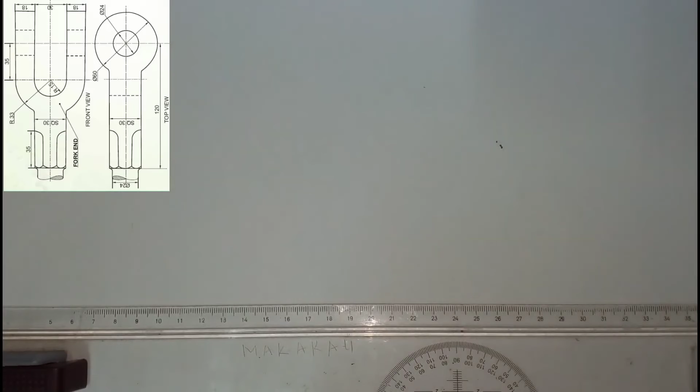Welcome to AASSA. In this video, we're going to look at isometric projection. The question I'm going to solve here, I've been asked by a lot of people to solve this question: I want to draw the isometric diagram of a knuckle joint.

So this one is the knuckle joint. We're also going to use templates which are on the set square.

I'm using 4H for construction lines. As you can see, my pencils are sharp - that is the trick in drawing. If your pencils are sharp, you're going to have a neat diagram. Just make sure that your canvas is tight.

You should be using this - this is the one I recommend. I'm using a clean rubber, and I'm using HB, which is the pencil I'm using for outlining. You can use B, it is also good. And my rubber right here, and I have my 30-degree set square, which is right here, and these are some of the templates that we're going to use.

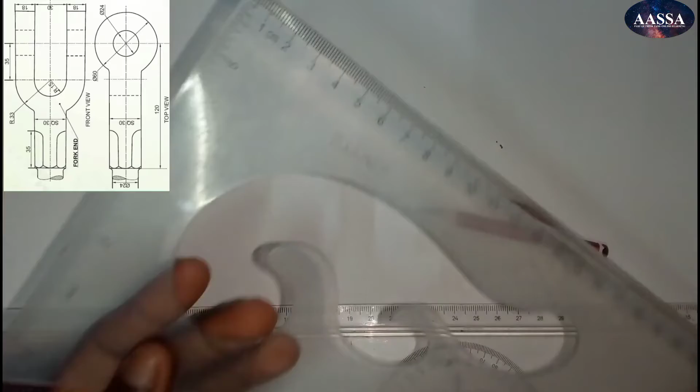So what do we do? Like always, first of all, I'm going to draw a reference axis. Make sure this one is as light as possible, just for you to see. This one is going to be our height, and we're going to draw our axis right here, and this one - so these are the axes that we're going to use.

This question is not for beginners. You should watch some of my videos to learn how to draw an ellipse in isometric projection, because if you don't know those things, this question is going to be difficult for you.

Now let's look at our question. In isometric projection, when given a diagram, there's an orientation which is best to draw the diagram, which is going to be easy. In this case, that is the orientation that we're going to use.

So let's look at the width. What I'm going to make my width is going to be that circular end. That circular end has a diameter of 60. So if something has a diameter of 60, that means the radius is 30.

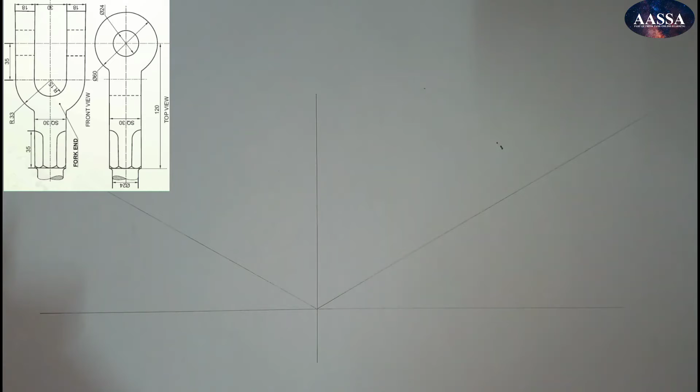So I'm going to come here and measure my 60 right here. It's just good to measure half, since we're going to need also 30. After doing this, I'm going to do the same right here - I'm going to measure 60 and 60. The reason why I'm constructing something that looks like a square is because I want to draw an ellipse.

For the height, we have 18 plus 30 plus 18. So let's start - we're going to measure 18 right here, we're going to measure 30, and we're going to measure 18.

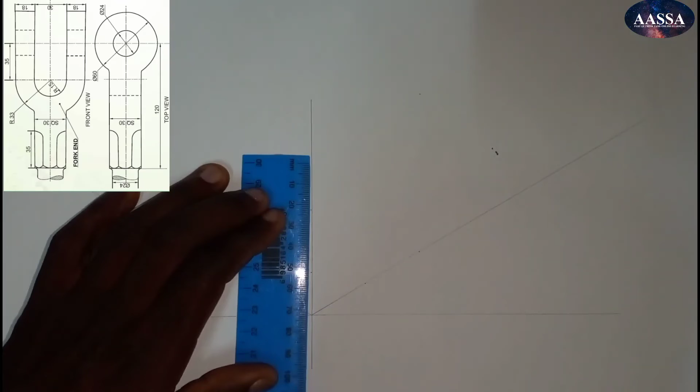Now what you need to do is take your set square, and we're going to project right here. We've measured 60 upwards, right here we have measured 30 upwards, and also going to do the same. In isometric, it's all about concentration, because we're going to have as many construction lines as possible, so you should just keep focused, know what you're doing.

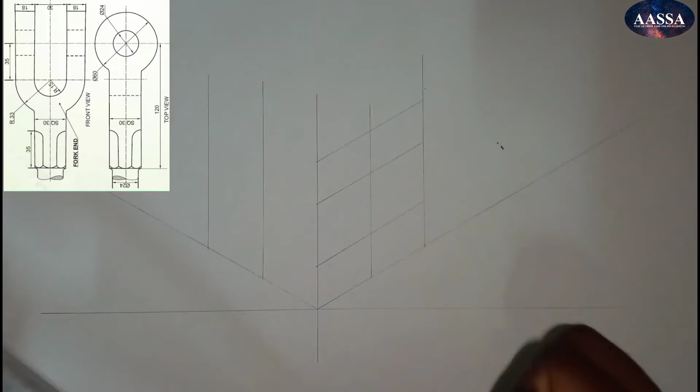That is where we marked 18, and right here it's 30, and right here we've measured 18. We're going to do the same right here - we've measured 18, and now it's a matter of joining these lines.

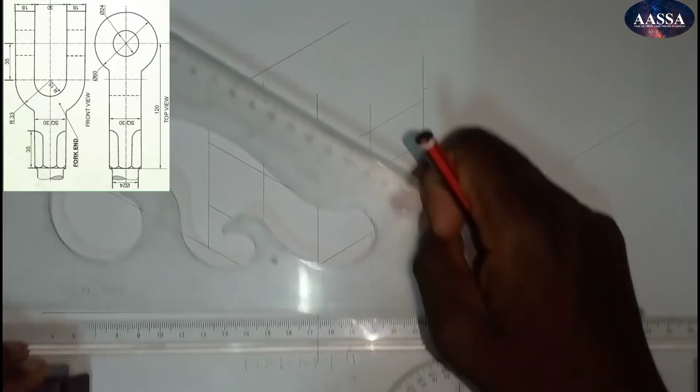So let's construct a box that is on top right here. We're going to come right here and right here. Now we're going to go to the middle of our top plane right here, we're going to join right here, and I'm going to come right here like this. We're going to come right here at this corner, draw this line, and I'm going to come at this corner and draw this line.

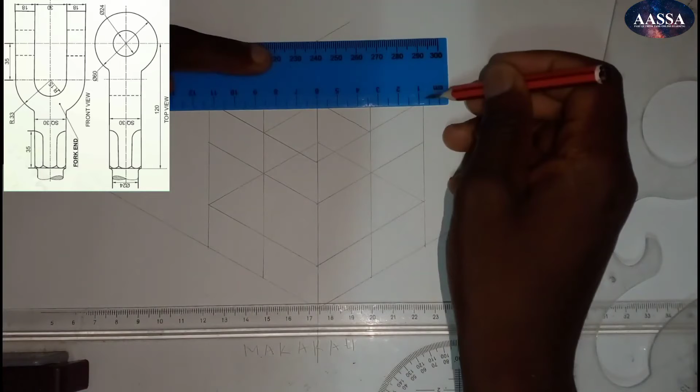Now it's time to draw an ellipse. You know the formula - we're going to join this diagonal with this diagonal. Remember, using 4H to do this, because these are all construction lines. After doing that, we're going to join this one and this one.

Like this, and allow me to mark this as one of our centers. So this is one of the centers that we're going to use. Now join this and this, and this one is going to be one of the centers that we're going to use. And this one is one of our centers, and this one is one of our centers.

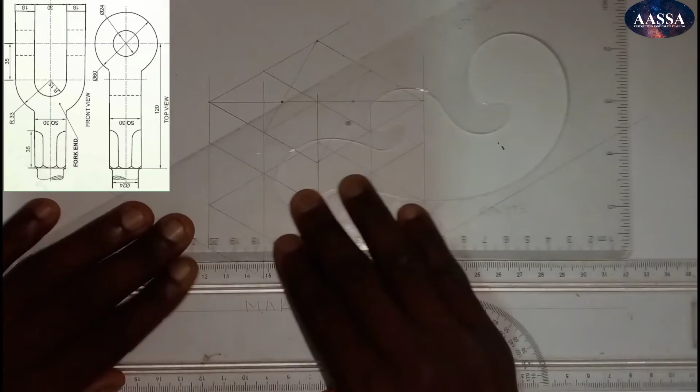Okay, so let's look. If you look at the end of the front of the fork end, you're going to see that it is 30 millimeters wide. So take a ruler. We're going to measure 15 right here and 15 right here. If we do that, we're going to have our square 30, right? So we're going to come right here, draw a line like this, and draw a line like this.

And now what we're going to do, we're going to take your compass, right? You're going to start come here at this one of your centers, right? As you can see, you're going to put your compass at this end, right here. And make sure that it will draw a very, very good circle, right?

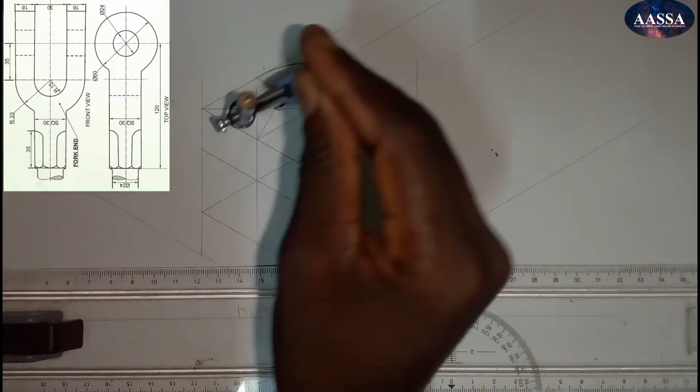And after that, you're going to strike a circle like this one. After doing that, you're going to come to this center point, right? If you come to this center point, you're going to complete this circle right here. Okay? And when you're done doing that, you're going to come to this point and put your compass where this circle ends, and you're going to complete the same circle.

Like this one. Now I'm going to come to this point. You don't want the circle to cross this line, right? So joining it up to here, and I'm going to need it to come right here. Okay, so it needs to touch this line.

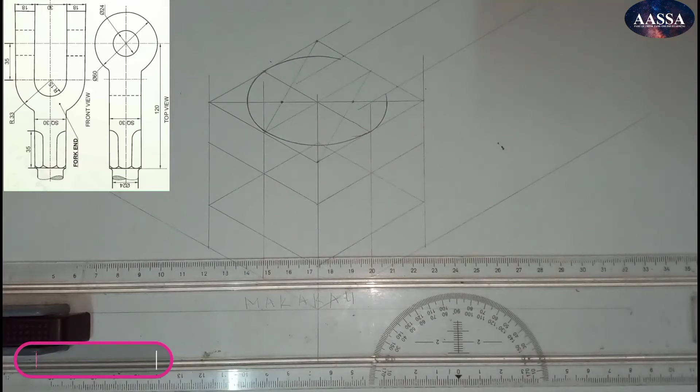Okay, and we have an inner circle. If you look right into the diagram, we have here a small circle that is on top of this one, and that one has a diameter of 24.

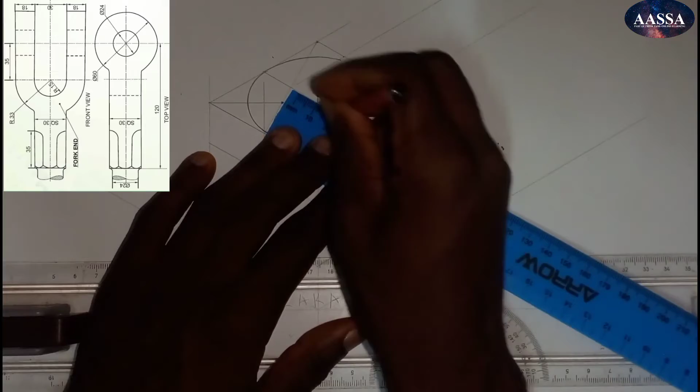So we're going to come to this point. Since it has a diameter of 24, that means we're going to measure 12 on both sides. And we're going to come to this point, this end, and to this end. So right here is 24, it's 12, 12, making it 24. Taking this as our center, we're going to measure 12 here. And if we do that, we're going to construct a square right here. So this one is our square.

So the thing that you have to do is to be focused, because you can see these are construction lines. They're going to be too many, but when you are focused and concentrating, you're not going to have a problem. And if your diagram is correct, you can see the long diagonal is already joined. So your job is just to join this diagonal and this diagonal.

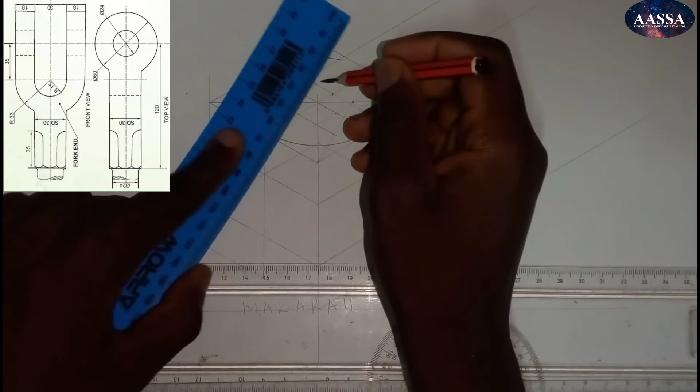You're going to repeat this circle for an ellipse. So if you don't know how to draw an ellipse in isometric, it's wise for you to check in the description. You're going to see a lot of videos where I've shown people how to draw a circle in isometric projection, right? So taking this as the center line, this one is going to be a full circle, so there's no need to worry.

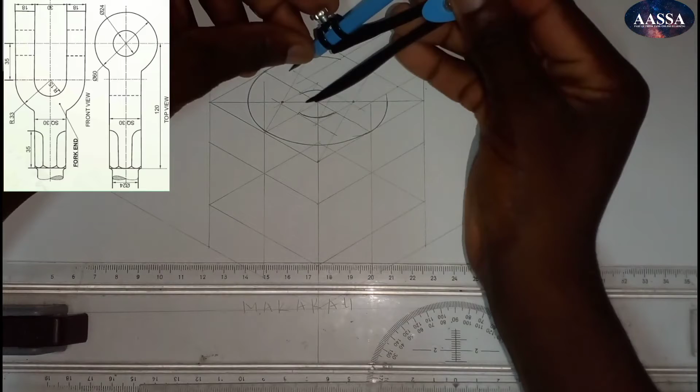Okay, now come to this point. Now we need to join this and this, right? And if your compass is not drawing a full circle, you may just change the position a little bit and look where it is going to fit, right? And I'm going to come to the opposite side, which is this one, and you're going to repeat the process again. I'm going to draw this circle.

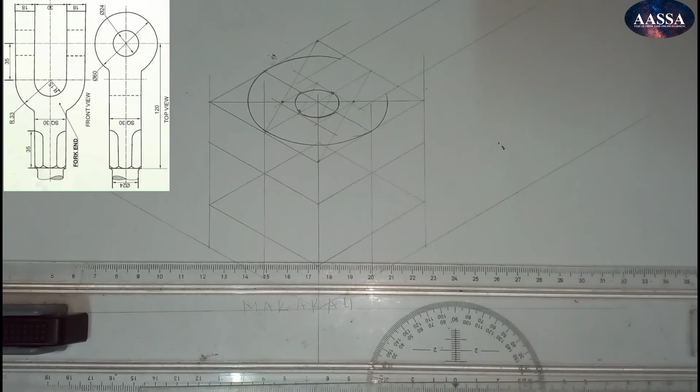Okay, like this. So before outlining, what I need to do, we have to draw an ellipse underneath. We're not going to do that. We're going to transfer those center points, right? So let's start with the center points for the big circle. That is what we need, because this one I'm not going to see it. So I'm going to just draw this, and come here and draw this, right?

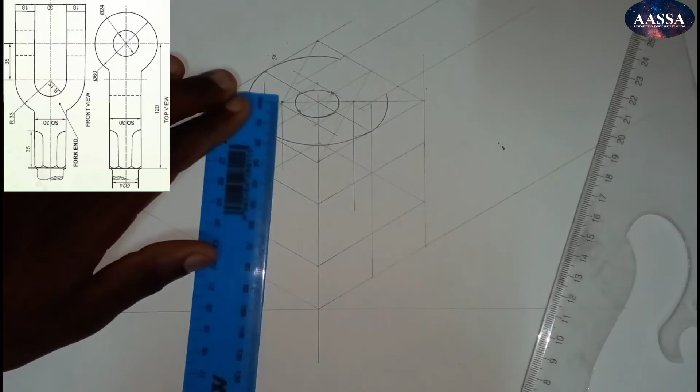So we know that the distance from here to here is 18. So I'm going to come to this center point right here, and I'm going to measure our 18 right from this center point. We're going to measure 18, and if you measured 18, make sure you marked it, right? And also going to measure this center point, the one at the end right here. And if it is correct, it should just pass through the outline, right? And if it is not, you can just continue and change it. So we're going to have our 18 right here, okay? And now come to this point.

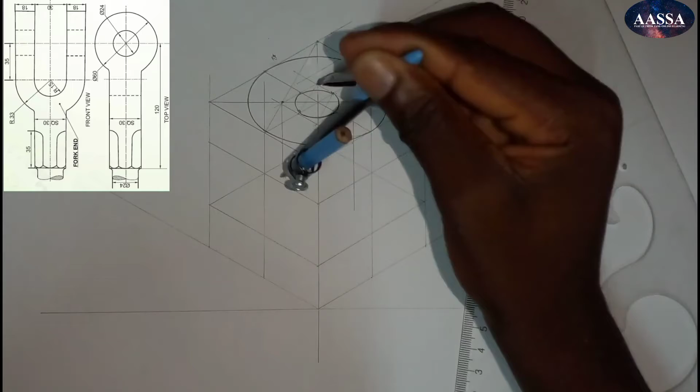This is where we opened our compass to draw this circle. This is how you draw it, and I'm going to transfer it to that center, and draw a circle like this one.

As you can see, they're going to come right here. We're going to bring our compass up to this point. This is the point, and now we've measured 18 from that center point, and we're going to draw this, making sure it just touches like this one.

After doing that, you're going to join right here using a straight ruler. You're going to come to this point, open your compass up to right here, where we've measured, then come to this point and touch this circle, drawing something like this. After doing that, take your ruler and join these lines.

Now, using this method of transferring centers, we can draw a circle here, but since there's a big distance right here, I'm afraid our circle may shift. If we make an error of 0.5 millimeters here and try to extend this line, the error will become big.

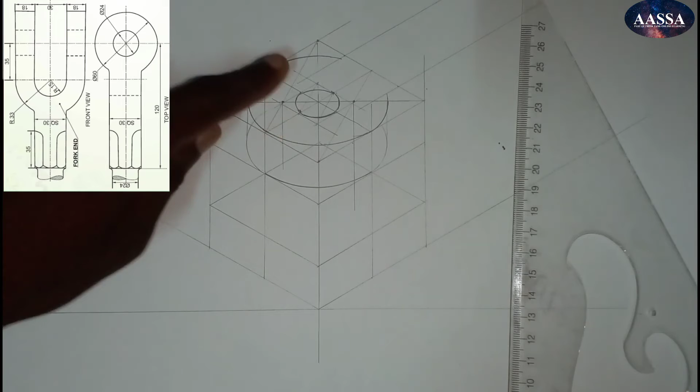So it is wise for us to just do a longer process right here and draw this one, join this one, and join this one. Now it's time for us to join this diagonal and this diagonal, and now join this one and this one. So this one is going to be our center.

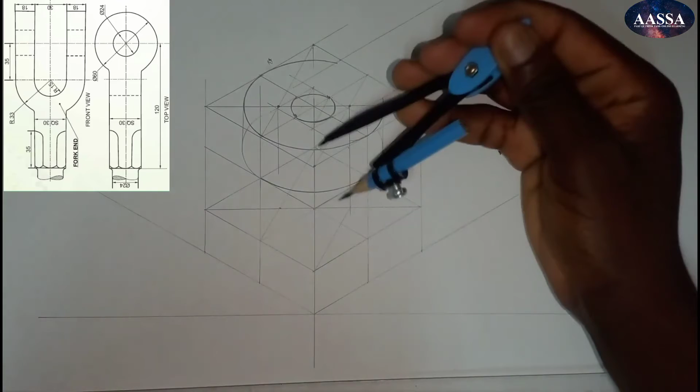Now we're going to take our compass. Using this as the center, we're going to touch this point right here and draw a circle like this one. Come to this point right here - this is our circle's center point. We're going to draw a line that will touch that circle.

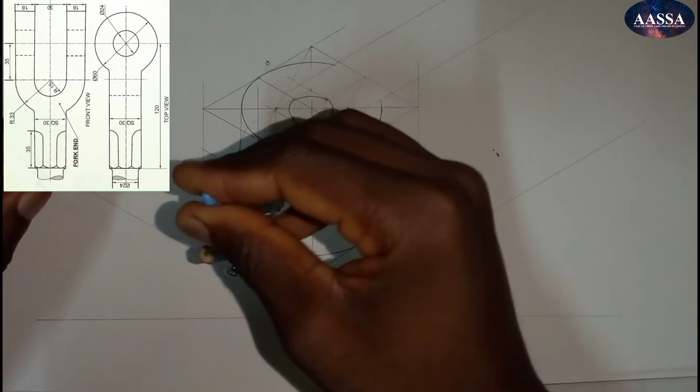Now come to this point. We're going to touch this line and draw a circle like this one. Now what we're going to do, you can even take our compass right here.

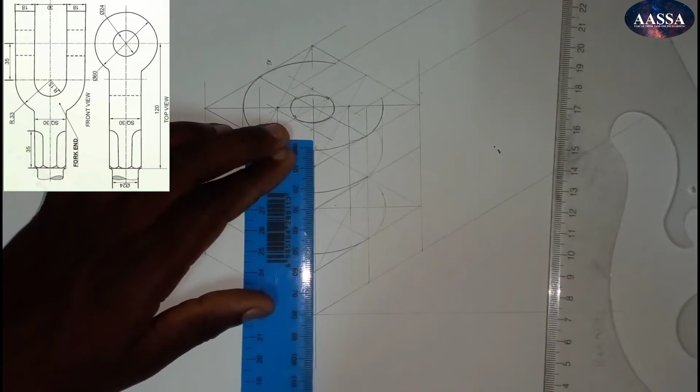You can see we're good now, and we're going to transfer those center points. Take a ruler - this one was our first center point right here. Extend it downwards, and we're also going to measure 18 from each center point - 18 right here and 18 right here. We also need 18 from this end point, so 18 right here. The reason I'm not measuring this center point is because we're not going to see it.

So from here to here we have drawn our circle. We're standing right here, so go to our new center point, which is right here. We're going to finish drawing this base, like this.

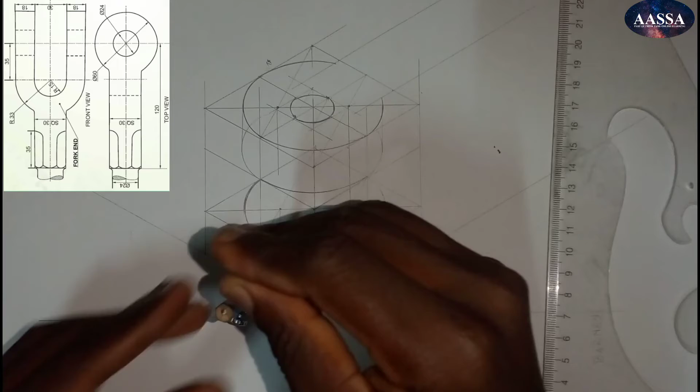Now open this up to here. Come here, and we're going to finish by doing this. Now when we draw this, we're right here, like this, and now going to finish. This is where our 20 is, and we're going to draw it like this.

As you can see, now we can join these two points together, and you can do the same right here. Things are just getting out of control with me - too many construction lines.

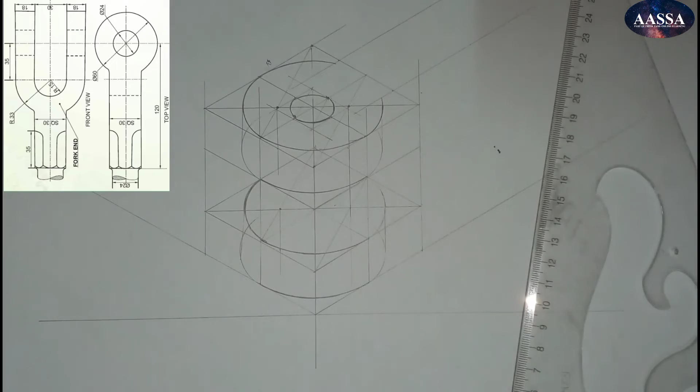Using this as our center point, I'm going to draw a circle right here. We're going to measure 12 right here and 12 right here, and also measure 12 right here and 12 right here. So just stay focused, don't get confused with construction lines. Now I'm going to join this and this.

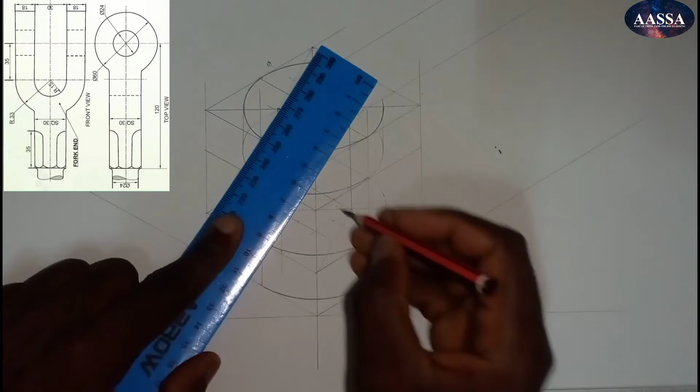Okay, and we're going to join this and this. We have the long diagonal already. Join these two center points, this corner and this corner. And now it's time we draw a circle right here.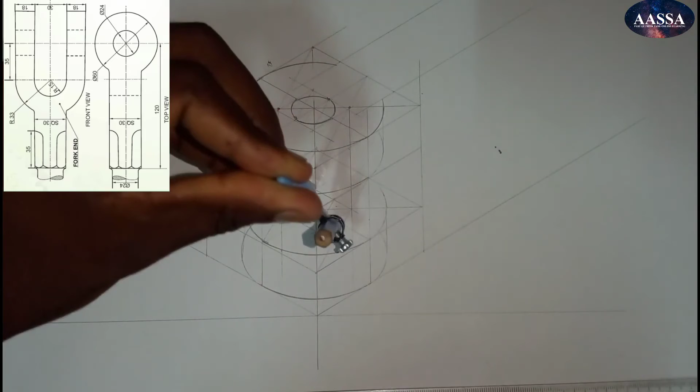Come to this point, and I'm going to draw a circle here. I just switch to using left so that I can't block the view. Okay, it's kind of shivering.

Right here, this is what we're going to have. Now come to this center point, and it's time to finish that little circle.

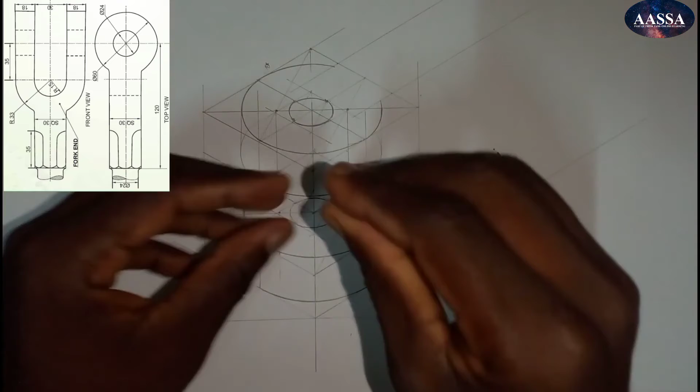Now come to this center point right here and finish this circle, like this.

Before I proceed, what I'm going to do is outline. If you're drawing circles, you need some center lines, so before we forget, let's put our center lines.

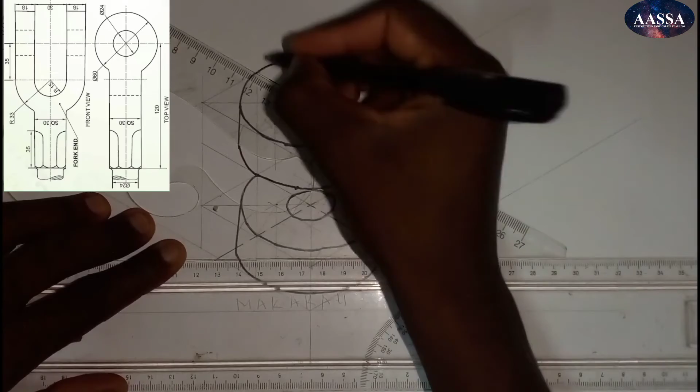Right here, and I'm going to put this one right here. Also going to do the same on top right here. When you're drawing a center line, you don't end with a short stroke, you end with a big one.

Okay, so this one. And now what we're going to do, take a ruler. We're going to measure 35 from the center point.

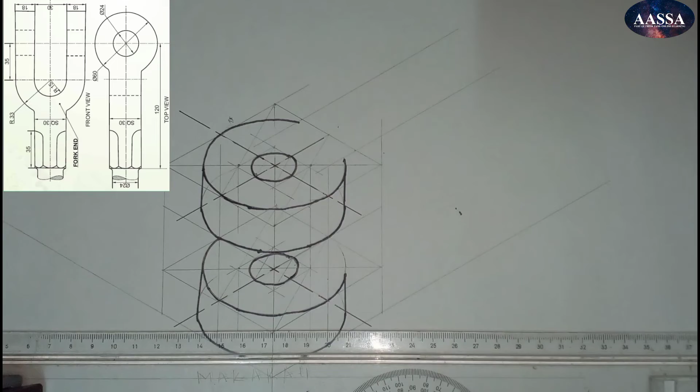So you can see it's going to measure... we're going to measure 35 from here. After I measure 35, check your set square, make sure that your set square is at a clean surface, because if it is not, it is going to make your diagram look bad.

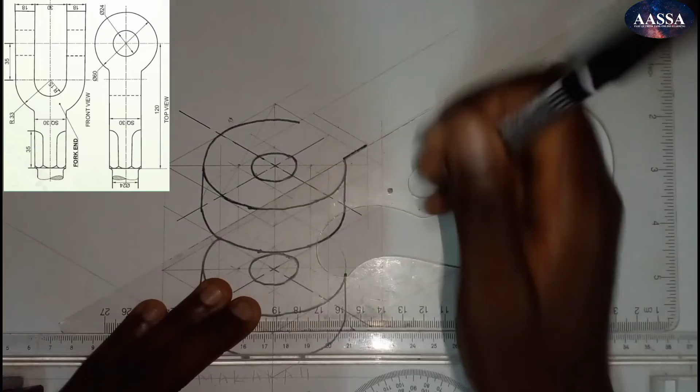And after doing that, you're also going to project this line downwards. And now, just in case in the examination you need to do something, just make sure you outline it when you are certain that you haven't made any mistake.

We know the distance from here to here, we've said it is 18. So I'm going to measure 18 right here, and after that we're going to outline. We're going to need 18 right here, and also a construction line, because this one is going to extend, we don't know where it is going to end.

And now we're going to go right here. This one is our center, so it is the same. We need 30 right here.

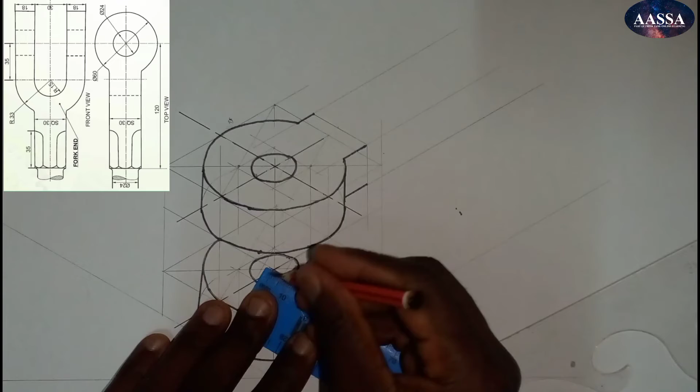Right here we're going to measure 15 from here, from this center point. So 15 is right there.

Take your set square and you're going to draw a line like this one. And now that you are certain that this one is correct, you can outline right here.

And now come right here, this line, also going to measure 18, and after doing that, I'm going to draw a construction line, this one, so this one should be as long as possible, and so that's this one.

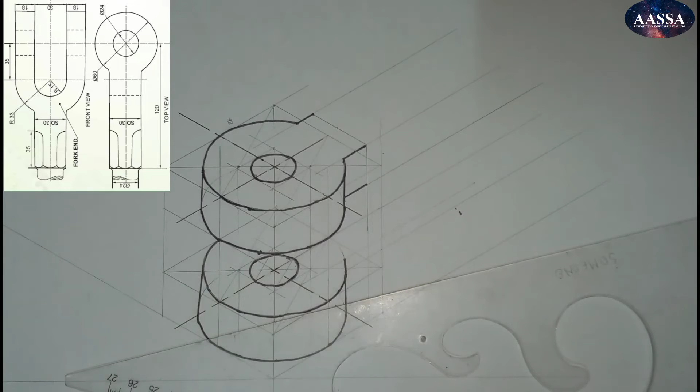And now it's time to outline up to here, but before we do that, let's project this line downwards. And what we're going to do...

That's the line that I constructed. It was not supposed to be there.

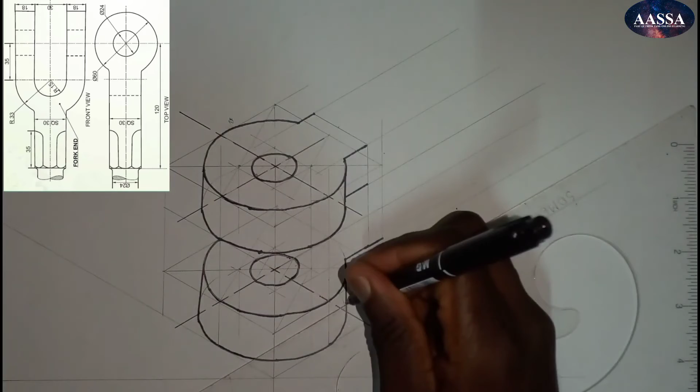Okay, so here, up to this line. Let's extend this one.

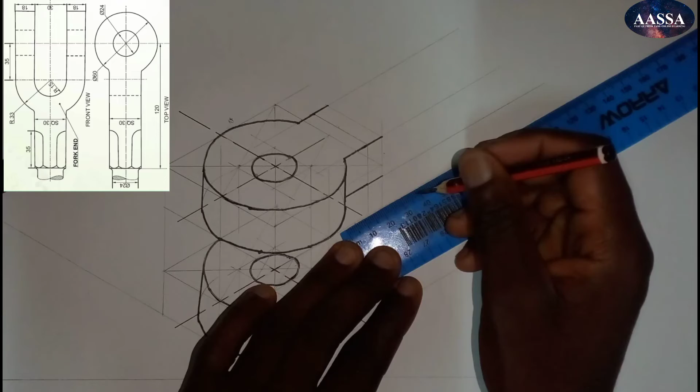Now what we're going to do, so you know that we need to draw an ellipse right here. If your measurements are correct, you should get 15. We're going to measure 15 on each end, 15 here and 15 going this direction.

If you do that, we're going to draw this one, it's going to be our ellipse. Right here, just pay attention and focus.

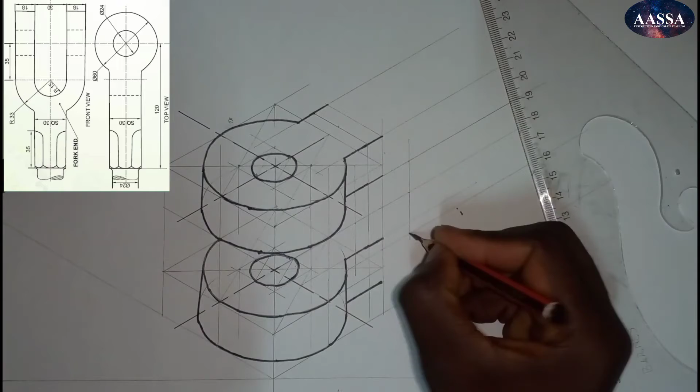So this one from here to here to here up to here. We know the corner points, and now it's time to join this and this, your center and this one right here, this corner point, and right here.

Now that you have your centers, you're only going to need these two center points. Take your compass, open it up to this point, and right here we're going to strike. Let's do that.

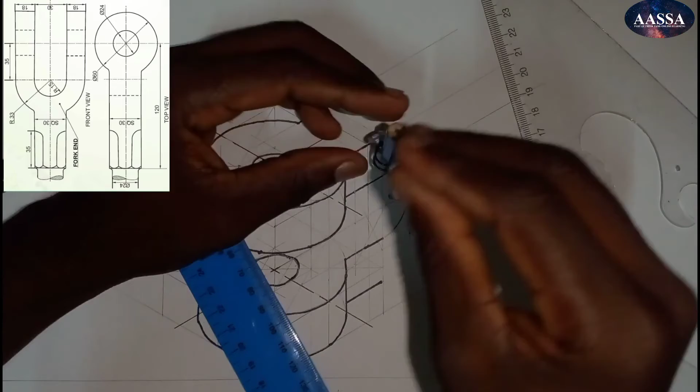Good. And now let's come to this point. Now it's time to join this and this.

Okay, that looks cool. What do we need? We need another big circle like this one.

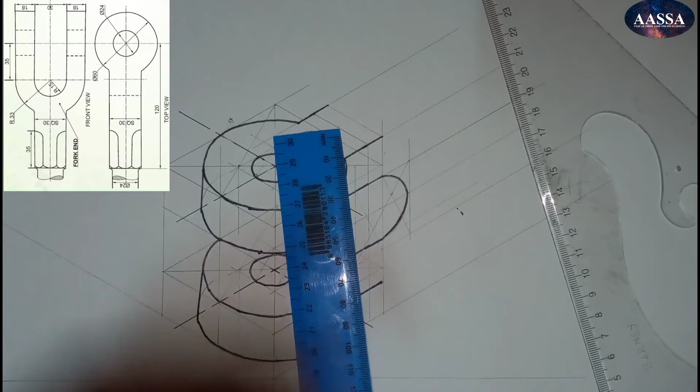Okay, so let's outline. From here to here, we know that's going to be 18 plus 30 plus 18, so that should give you 60... that should give you 66. 18 plus 18 is 36. Okay, so from this point to this point, that should give you 66, right?

Okay, so if you have 66, you're only going to measure 33 on each end, right? Using this as a center point, so 33 right here is what we are going to do.

Okay, and once we do that, we're going to come here and draw this and make sure this line is extended up to here, and we have measured 33. It's right here. So I'm going to make this line a bit crazy so that I can see where I'm ending when I join this diagonal and this diagonal.

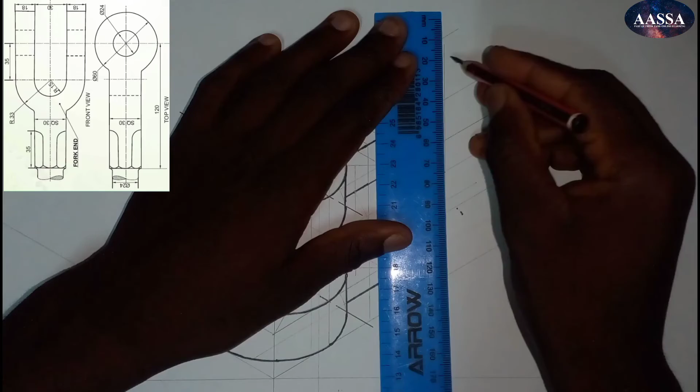Okay, it's actually here. And now from our center up to here, which is right here, and now to the corner. Where's our corner? So the corner is right here. Okay, and it's going from here.

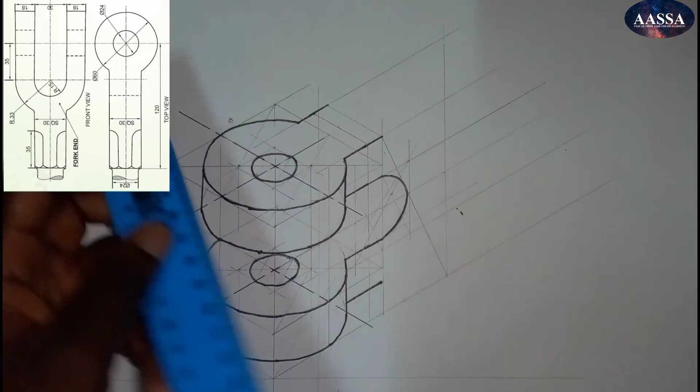So I'm going to come to this point and this point, right, and just make it long so that I can just reference it from here. Okay, so from here it's going to be simple. I'm going to come to where this diagonal line...

Okay, so this was supposed from here to here. Okay, just be careful right here. And now I'm going to come to where this line is going to meet this line. It's meeting it right here. Now I'm going to come to this point, right?

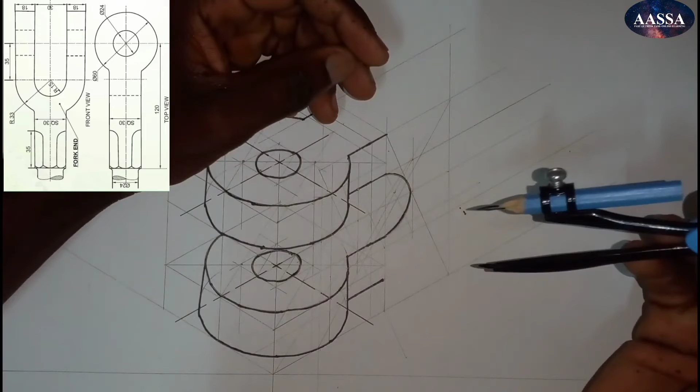Okay, and now I'm going to draw a smooth circle like this one, and I hope yours is good. Okay, now come to this. This is where these two lines are joining each other. And now if you connect this line, you should draw a line which should touch this, right?

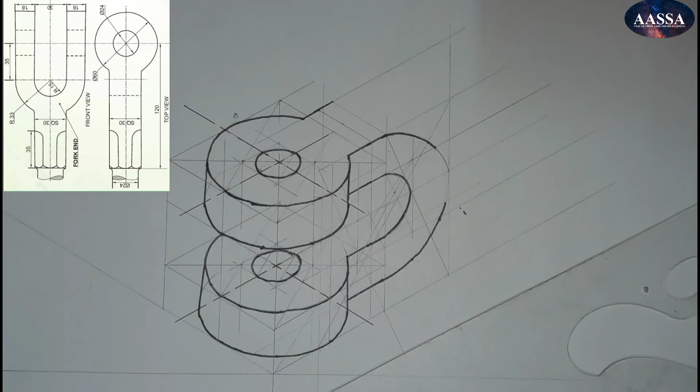Something like this. Okay, and if you do that, now what you need to do is just extend these lines, right? We know where it is meeting, so I think you can outline, right? Okay, and now it's something like this right here.

And what I'm going to do, we're going to transfer centers, right? So remember the center line, the center point that we used to draw, which was right here, and the distance from it is 30. So I'm going to go to that center point, right? Just make this one as long as possible.

Why am I making it as long as possible? So that you can just easily track it, right? So this is the line which is going to touch right here, and from here I'm going to measure 30, and 30 is right here. Okay, so when I drew this circle, right, this one, I was right here.

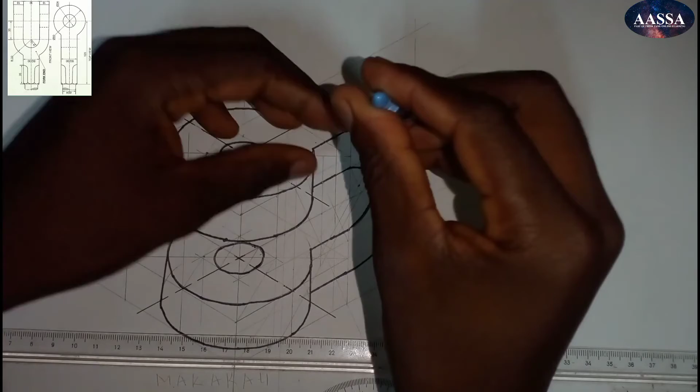Now I'm going to go to where I've measured 30, right here. Now I'm going to go right here, and I'm going to draw something like this. And when I'm certain that this is what I want to draw, I'm going to take my ruler and outline, right?

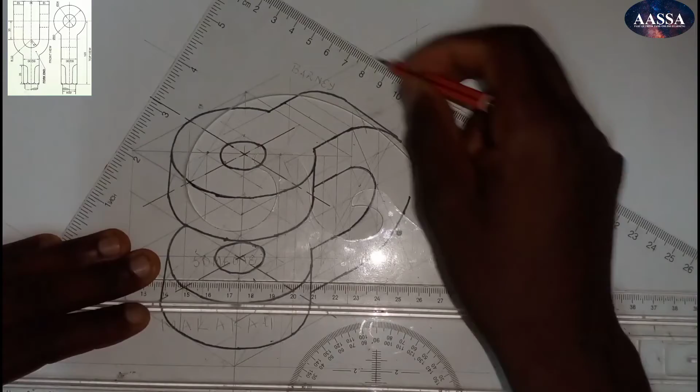Okay, and what are you going to do? Okay, so right here, just going to construct something like this, okay, to maintain that length, right? So we need 30 right here, so just going to come here and measure 30 right here. And as you can see, the 30 is right there.

So I'm going to come to this center point, right? As you can see, the center point of this line, you're going to come right here, and this is where I need you to measure 120, right? So we're going to measure 120 right there.

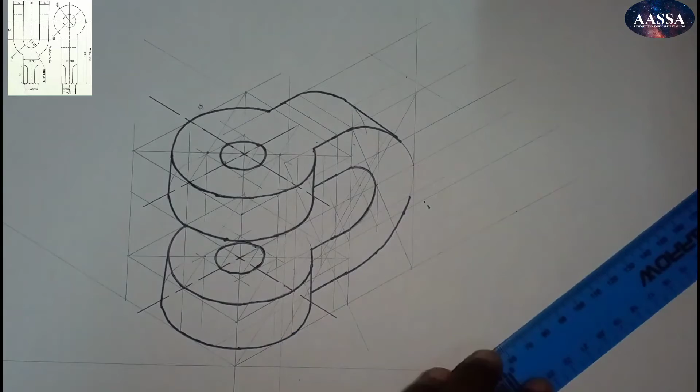And after measuring 120, just need you to construct a line, okay, like this one. Now I need you to measure 35 millimeters from the end of that line, from the end point of that line right here, okay.

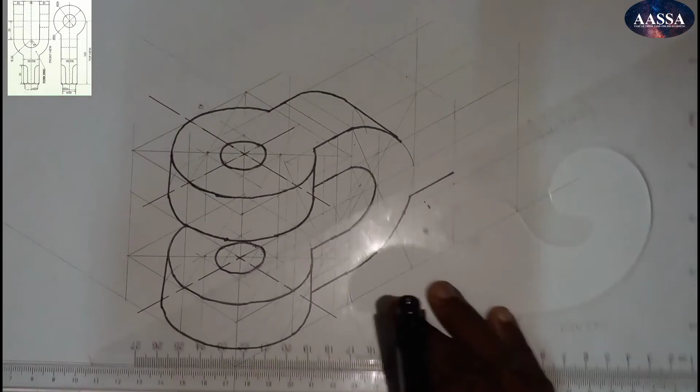And I need you to draw something like this, okay. And after doing that, so I'm going to come right here and draw a line like this one. I'm going to draw this one again, and it is ending right here.

Let's just draw an axis so that you can see where this line is going to end, right, like this, okay. And right here, what we need, you're going to take your set square, and you know this is where it said 120 is ending, right?

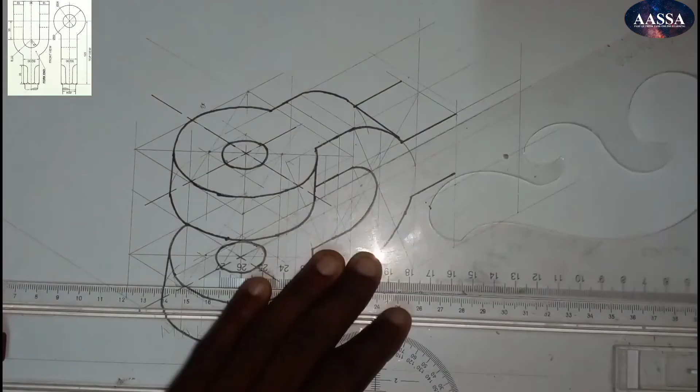So let me just try to put it right there, and I'm going to draw a line like this one, okay? And right there, there's where the line, this line is touching that construction line. Let me try to make it dark like this one.

Then we have this one, which is right here, and this one, which is right here, okay?

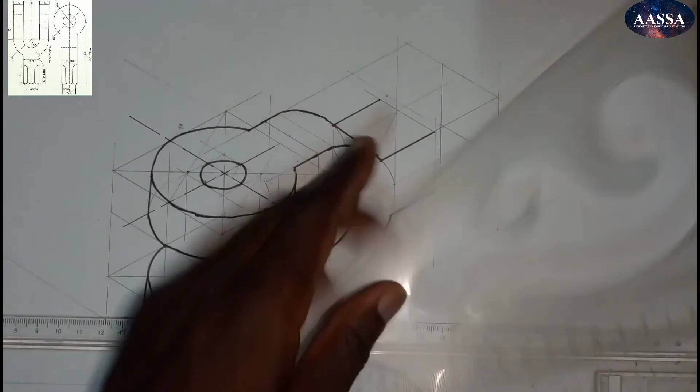And from here we have this center point, right, which you can see right there. I'm going to construct it like this, okay? And now it's time to divide this.

As you can see, it's 30, so I'm going to divide this to make this one 15. I'm going to draw a line like this, okay? Now join this long diagonal and join this one, and join this one, okay?

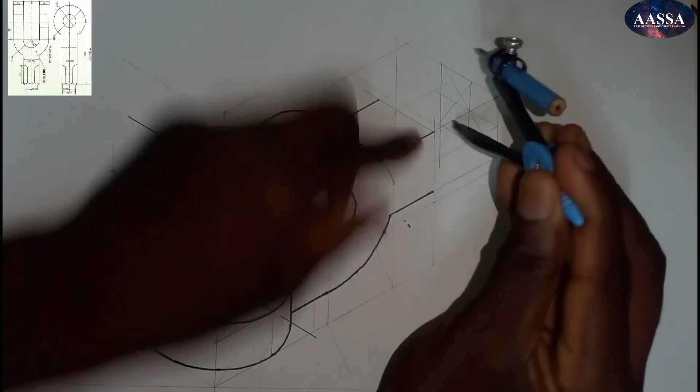What I'm going to do, so this one is our center point, just going to draw an ellipse, right? And this, we're going to draw this in construction line, right? So that's what we're going to do.

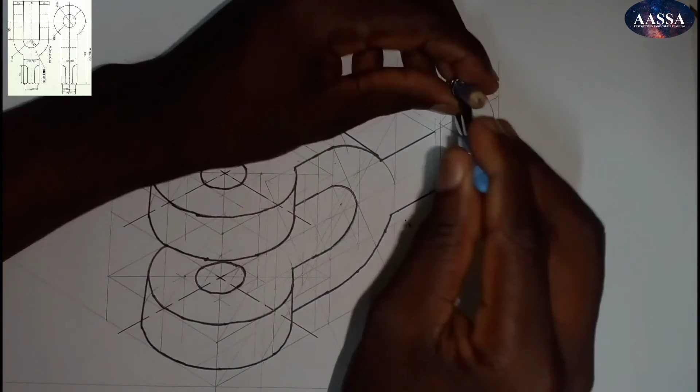I'm going to come and draw something like this, okay? And now I'm going to come to this, which is the center point right here. We're going to draw, so center point is right here.

As you can see, we're going to draw a line like this one, okay? And I'm going to come to this center point right here, and I'm going to draw a line which is going to touch right here, okay? And now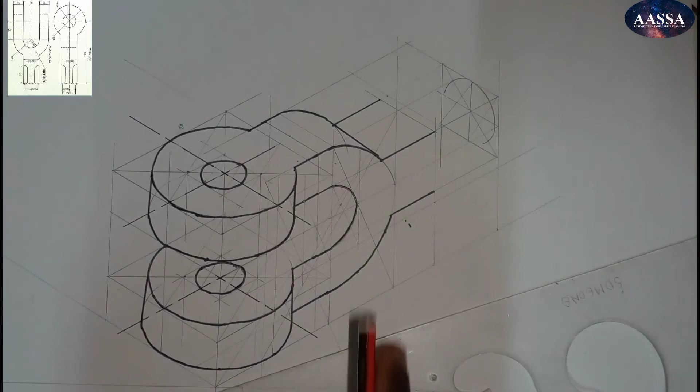I'm going to take this one, and right here I'm going to use this template. So just know that since it's isometric, right here it's going to be a little big, and right here it's going to be a little small, okay?

So I'm going to take a template, right? And those are the things that we're going to use right here. So if you take templates, just find where they can fit perfectly, okay? Where they can fit perfectly, and I think right here, okay? You take them.

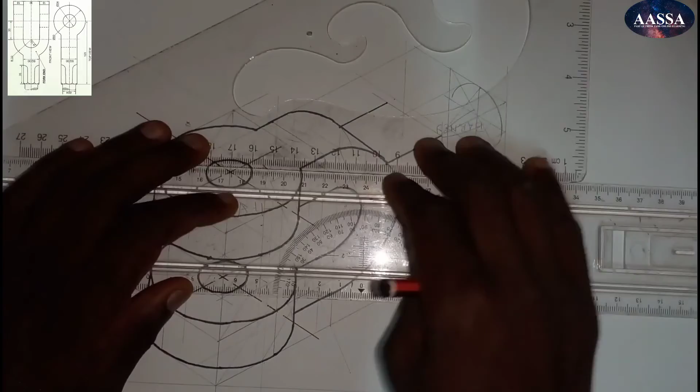We're going to come right here and find where you think it is just perfect for you, okay? So I think right here is fine, okay?

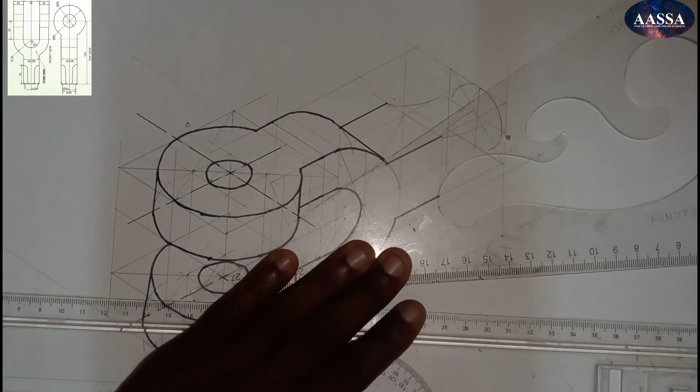Now lastly, this piece, okay? So right here, then I'm going to draw, okay? So just think right here, and I'm going to try to connect this and this, okay? So I think right here I'm good, right here I'm good, okay?

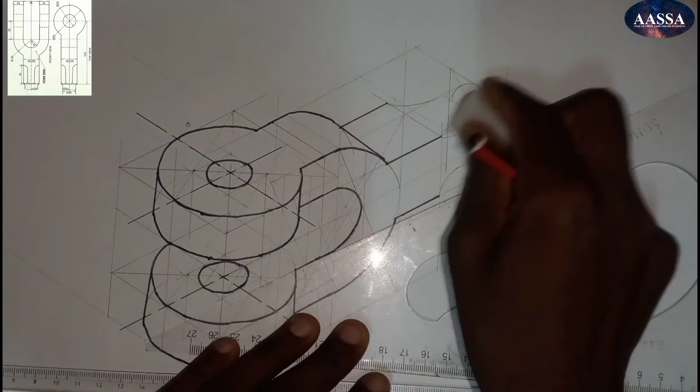And right here I think this one is just small. I'm going to try to make them just a little bigger, right? Okay, so I think something like this will be fine, okay?

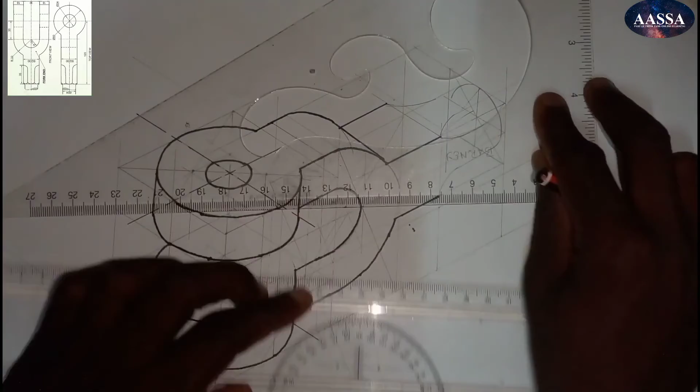And come right here and draw something like this, okay? Now just trying to join them just like this, okay? Now go to where it is ending right here, and right here you just need it to be very, very, very, very small, right?

Okay, something like this right here, and something like this. Good. Okay, and I think if we do this, we're good to go.

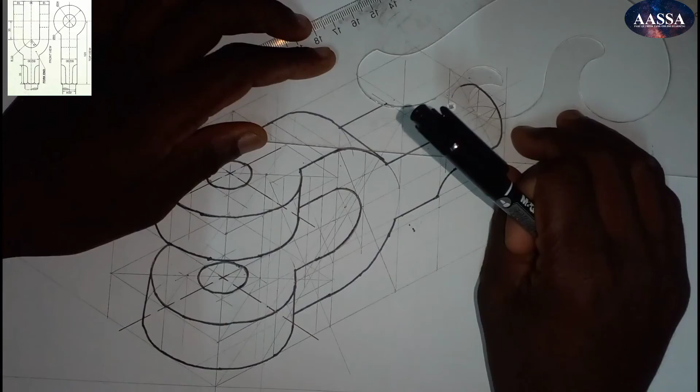Okay, so now let's see what we have. Let's outline. Okay, so we have something like this right here, and we have something like this right here.

Okay, and now what about here? We have something like this. Okay, and right here we have something like this.

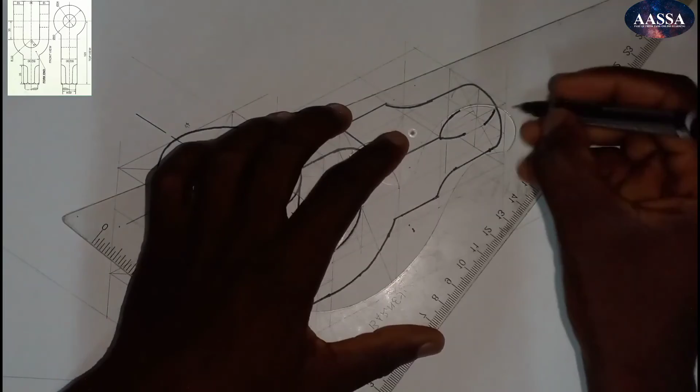And now it's time to connect this line and this line, and right here is going to connect this and this. Okay, like this, as you can see. That's our win, right? And lastly,

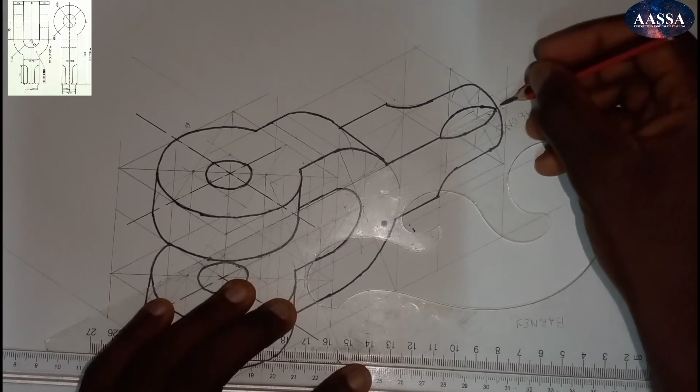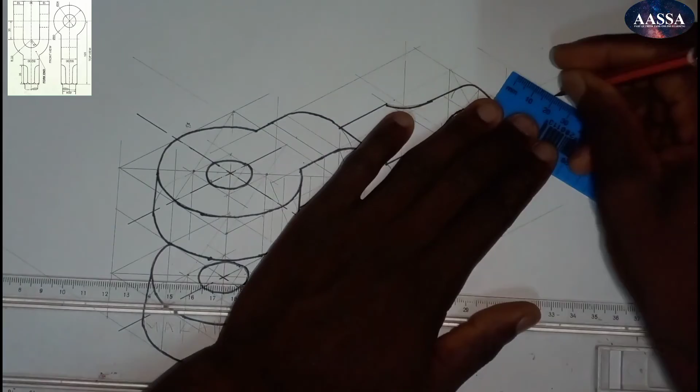we're just going to draw, take this one, a center point right here, which you are seeing right there. Okay, we're not sure the length, so I'm just going to measure something that you think is reasonable and draw this one. But I told the diameter of the shaft, right? That one it is 24, right? So we're going to measure 12 right here and 12 right here.

We're also going to measure 12 right there and 12 right there. And join these lines, right? Like this.

Okay, now join this center point, draw the ellipse. So if some of you have seen that I'm only going to apply ellipse. If you know how to draw ellipse, if you know how to transfer centers, yes, this question was not going to be a challenge for you, right?

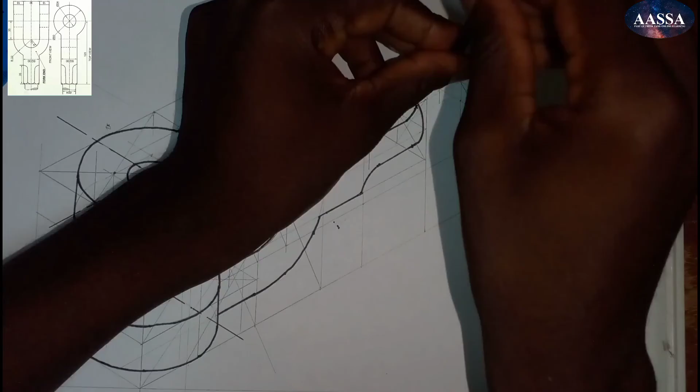So from here to here, it's now time you draw a circle, right? Circle like this, and come from here to here, right here. Going to draw a circle, and just make sure it is going to touch this point, right? And from here, make sure it's going to touch the line.

Okay, after doing this, take your center, take your lines right here. Okay, and if you do that, just outline.

Okay, so this one is the end of our tutorial, and I hope you've enjoyed, right? So this is drawing. If yours is not like this, just don't worry, right? Just practice it a little more time, right?